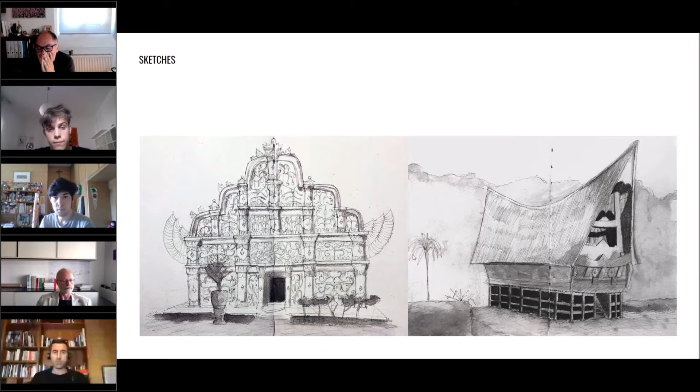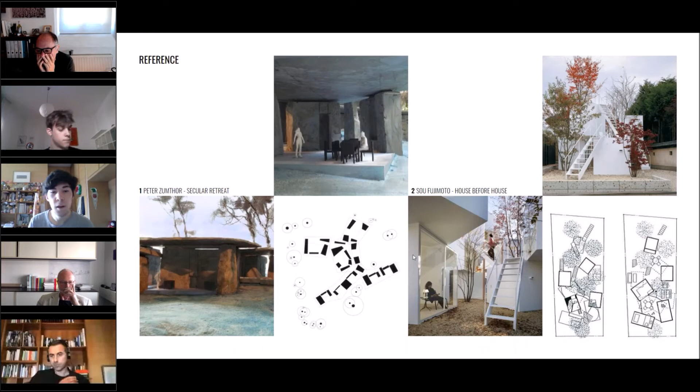Another aspect related to this multicultural chapel was creating a cluster with different people from different cultural and religious backgrounds. That means a much richer cluster instead of having separation between different religions, as happens not only in Indonesia but, I think, all over the world.

These were our references. The first was this project by Peter Zumthor, and we got inspired by this atmosphere and this house that has no perimetral walls, but only a ceiling, a floor, and some walls to define the space. The other project is from Fujimoto, who builds boxes that function as rooms.

The space in between becomes not only the circulation part of the house, but an extension and a connection with the outdoor.

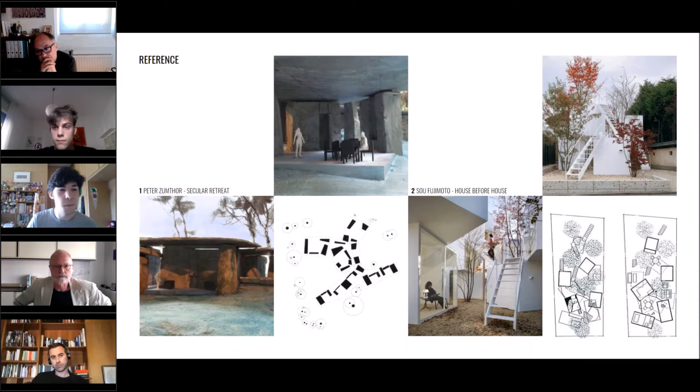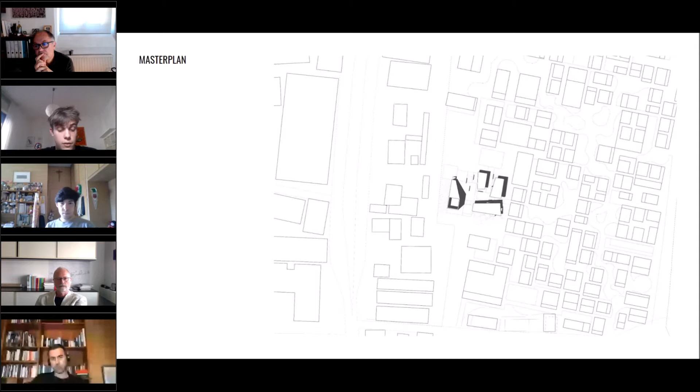But we have redesigned the volumes and rearranged them differently while trying to remain in harmony with the context and with the urban plan.

The chapel is located in the left corner, and it's anchored to the square, but it floats more delicately on a water pool that is here.

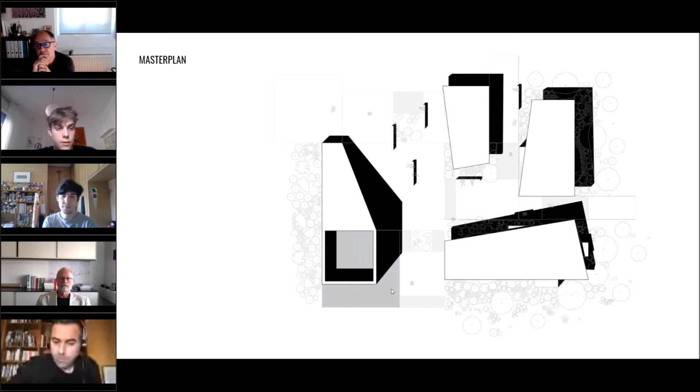The access is located in the upper right corner of the chapel, and the building located at the bottom, the one on the right, are the houses with the dedicated spaces for local crafts.

The building at the top is a public covered space with a market area. And all the buildings are surrounded by dense green spaces that become like walls.

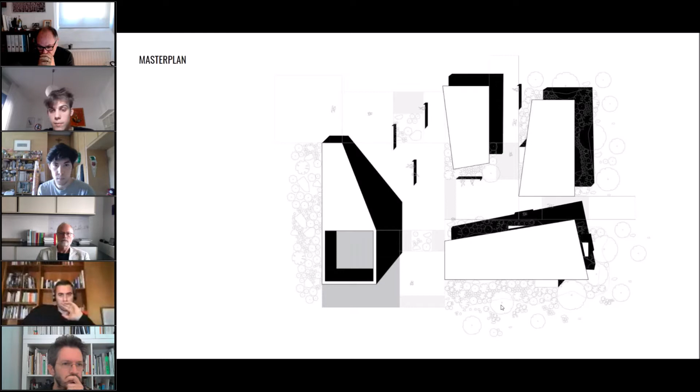Here we can see how we projected the houses, which are some rooms under a roof. We started by creating these boxes, and then we eliminated some walls and defined the box with just a few walls—in some cases three, in some cases two, in some cases just one wall.

So they can be open or closed with curtains, which creates a more private room, maybe for sleeping, but in the daytime you can put away your bed and open up to have a bigger living room. We think it's important in small houses like this to be able to use all of the house in all moments, not having a room just for sleeping and a room just for living, but making it adaptable.

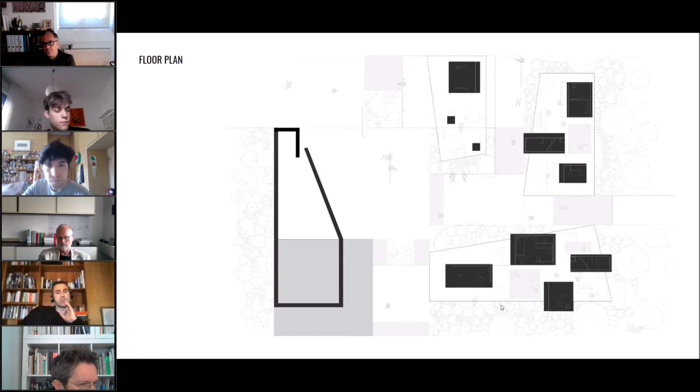We see how the house is built by many boxes, and our idea was to just project the bathroom and the kitchen as the essential part of the house, and the other space is totally free for the inhabitants to furnish their own houses and decide which room is which.

On the left, we have this workshop for local activities like batik making or jewelry. That is the input in the most public space of the house, near the square, so that people can see these artisans working, and they can get inspired by them, maintaining alive this really interesting tradition.

Another aspect is the privacy in this house, which is characterized by really open parts like the living room, which has a little bit of privacy with this green-like zone that provides not only a nice view and contact with nature, but can also be seen as an element that gives privacy.

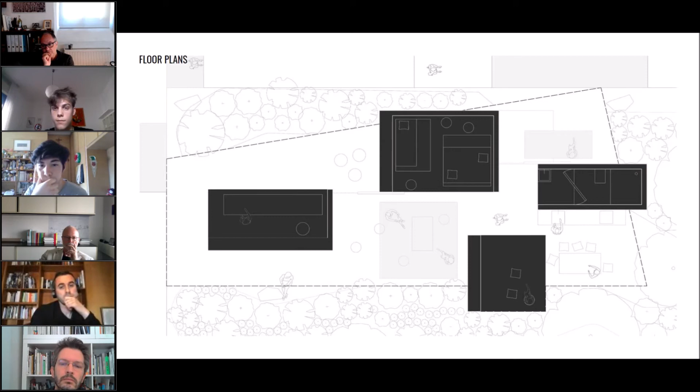We did a little research of local plants and local vegetation, because in the green area we didn't want to create just a monotone zone, but different landscapes using different types of plants. For example, one corner could be more tropical, another zone could have high trees that provide shadow, or low bushes that give a beautiful landscape. So having different green zones instead of just the same thing all around.

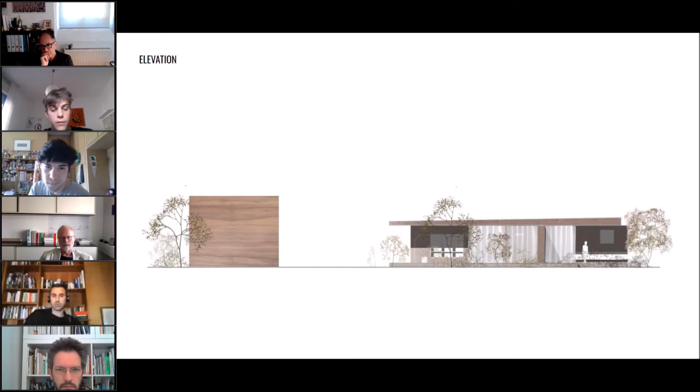This is one of our elevations. Here you can clearly see the difference in the perception of volume between the houses and the church. The material we chose for the buildings is concrete, but with different superficial treatments and finishes.

In this image we can see these gaps between the walls and the ceiling, which gives the house a sense of lightness, very important because we decided to separate the houses and the chapel not using shapes but mass.

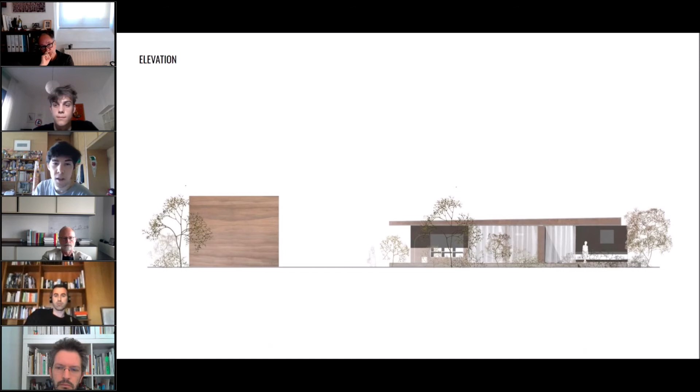So the houses, we wanted to have a really light look, very open. And the chapel is very heavy, very closed, as we see in the elevation. We have a similar plan form to create a connection between them, but in elevation we thought they had to be different, in order to give the chapel a sacred feeling, and also the big empty square

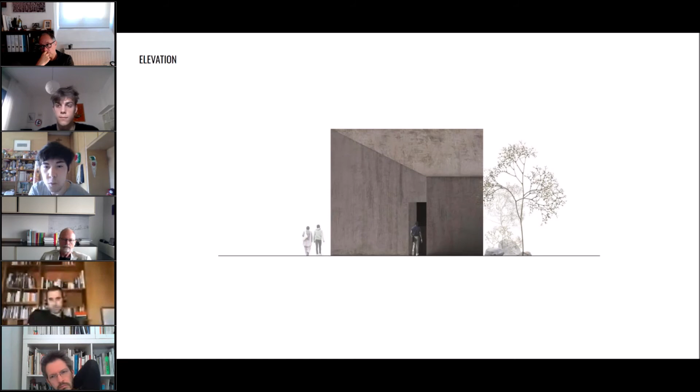in front of the chapel gives it some importance. So the entrance of the chapel is this little hole created by shifting a wall, giving the sense of an open door, which makes you want to explore it. It's interesting because we wanted to give an experience when you visit the chapel, so it has to be magnetic and catchy.

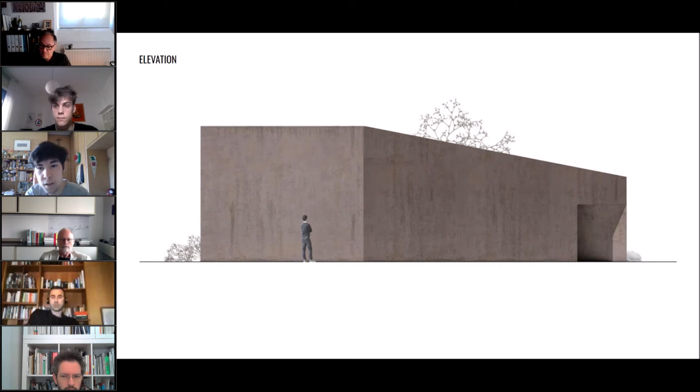And once you walk in, you are in a really different space that you didn't expect, because outside is so heavy and closed, but inside is all about the light and the path from the dark area to the light area.

We like this idea of having two rooms that are connected, but you can see this light-filled water room that you could not physically go to, and you maybe can reach it by praying with your imagination and not just going inside. So we think it gives it a sacred feeling without having symbols, and this was very, very tough for us.

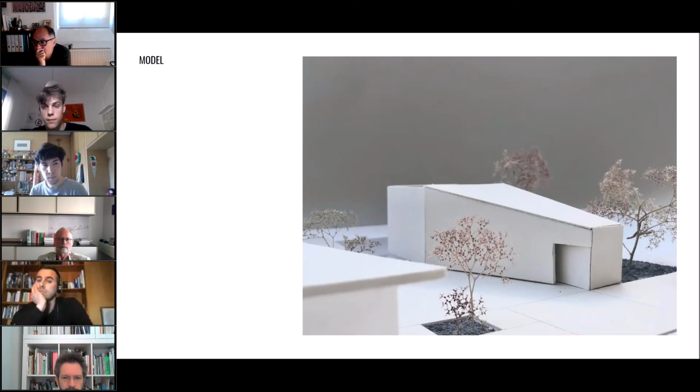Now there are some model photos and I will show you them. Here we can see the entrance. In this photo you can see how we treated the square.

Now the next one, which has these lines engraved in the pavement that divide the square into smaller squares, becoming more of a human scale near the houses, and becoming more open and monumental near the chapel.

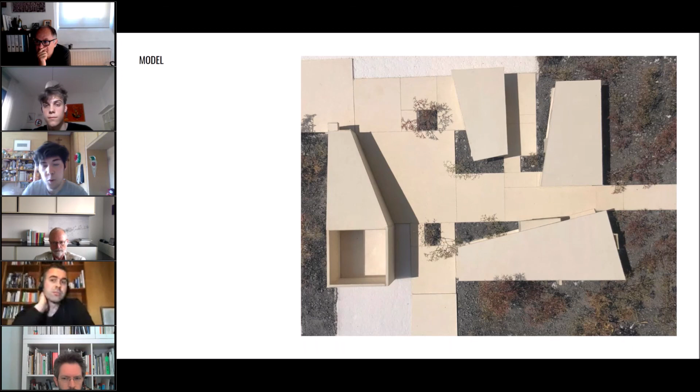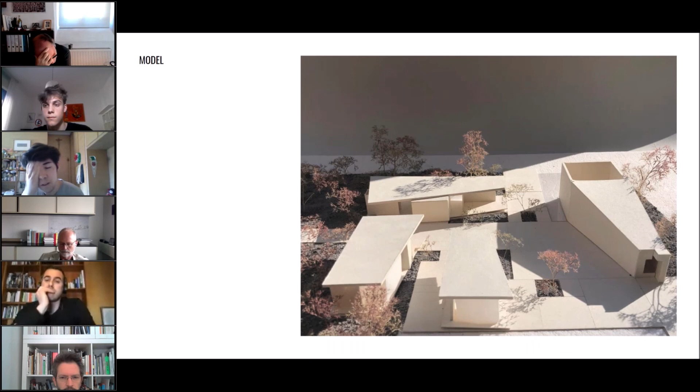Another aspect is the green zone that is really dense near the house, which also gives privacy, and it fades away creating a sort of park or garden for people to walk or stay, but they cannot reach or go close to the houses because of the density of the plants.

Here you can see how inside the chapel you can see the water and these rooms, but you don't have access to this part of the chapel. Yeah, it's unreachable.

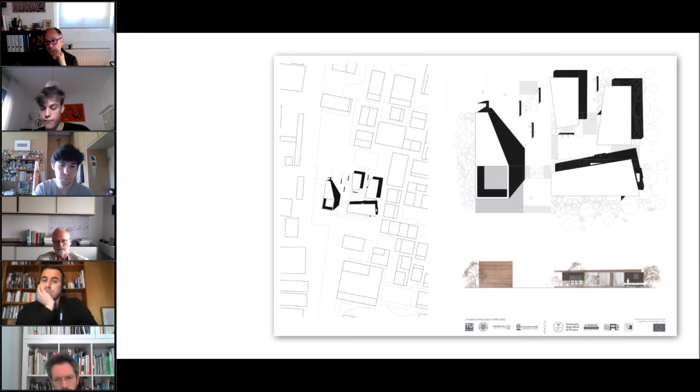And that's the imagination of some of the final drawings that will be printed. We are still working on the poster, and on the others. And we are finished.